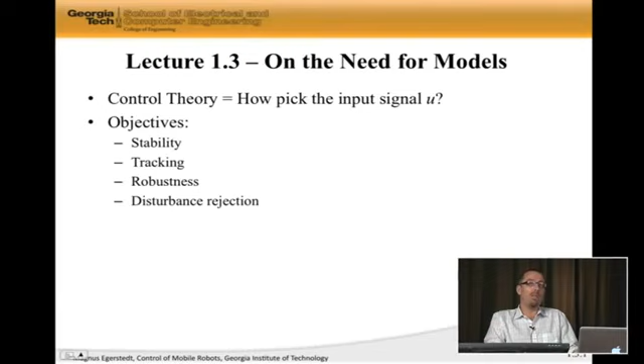A companion to robustness, in fact, one can argue that it's an aspect of robustness, is disturbance rejection, because at the end of the day, we are going to be acting on measurements, and sensors have measurement noise. Things always happen. If you're flying a quadrotor in the air, all of a sudden you get a wind gust. Now that's a disturbance. If you're driving a robot, all of a sudden you're going from linoleum floor to carpet, now the friction changed. So all of a sudden you have these disturbances that enter into the system, and your controllers have to be able to overcome them, at least reasonable disturbances, for the controllers to be effective.

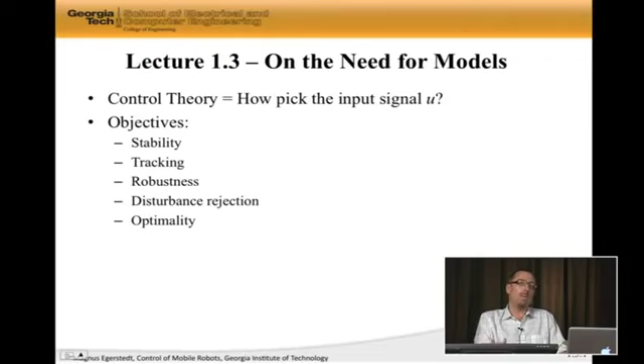Now once you have that, we can wrap other questions around it, like optimality, which is not only how do we do something, but how do we do it in the best possible way. And best can mean many different things. It could mean, how do I drive from point A to point B as quickly as possible, or using as little fuel as possible, or while staying as centered in the middle of the road as possible. So optimality can mean different things, and this is typically something we can do on top of all these other things. And in order to do any of this, we really need a model to be effective.

So effective control strategies rely on predictive models, because without them, we have no way of knowing what our control actions are actually going to do. So what do these models look like? Let's start in discrete time. This means that at distinct time instances, things happen.

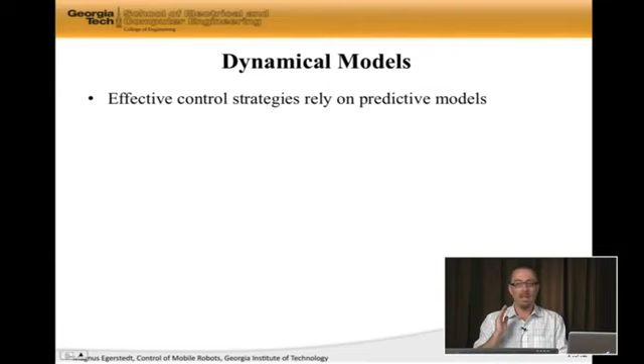In discrete time, what we have typically is that the state of the system, remember that X is the state, at time instance k plus 1 is some function of what the state was like yesterday at time k, and what I did yesterday. So the position of the robot tomorrow is a function of where the robot is today and what I did today. And F somehow tells me how to go from today's state and control input to tomorrow's state. This is known as a difference equation because it tells you the difference between values across different time instances. So that's in discrete time.

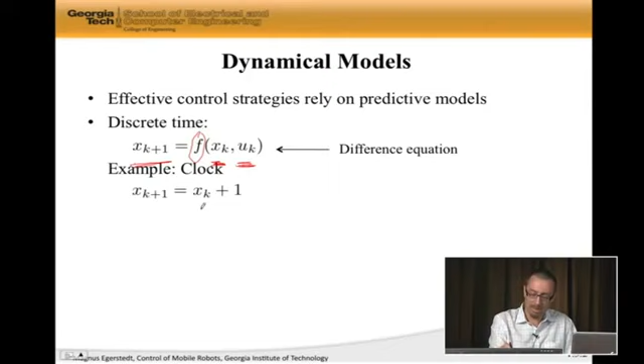And here's an example of this. This is the world's simplest discrete time system. It's a clock or a calendar. This is the time today. Now I'm adding 1 second, and this is the time 1 second later.

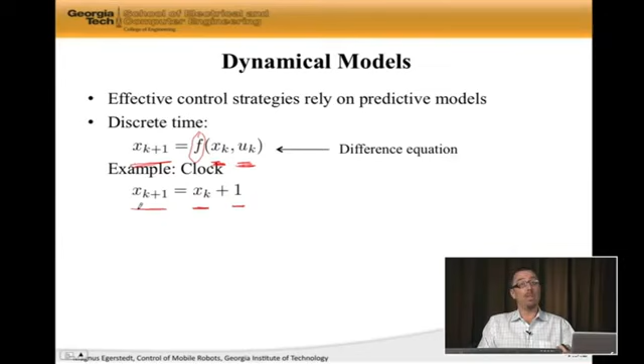So the time right now plus 1 second is the time 1 second later. This is clearly a completely trivial discrete time system, but it is a difference equation. It's a clock. So if we plot this, we see that here is the state, which is what time it is, as a function of time. So it's silly, but at 1 o'clock, the state is 1. At 2 o'clock, the state is 2, and so forth.

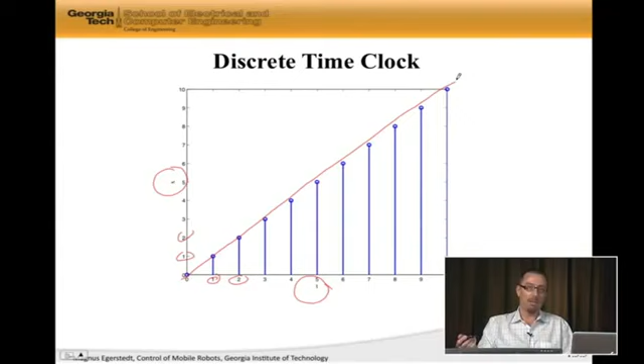And you get this thing with slope 1. So this would be the world's simplest model. There are no control signals or anything in there, but at least it is a dynamic, discrete time model that describes how a clock would work. Now, the problem we have with this, though, is that the laws of physics are all in continuous time. And when we're controlling robots, we are going to have to deal with the laws of physics.

Newton is going to tell us that the force is equal to the mass times the acceleration. Or if we're doing circuits, Kirchhoff's laws are going to relate various properties to capacitances and resistances in the circuit. So we're going to have to deal with things in continuous time. And in continuous time, there is no notion of next. But we have something almost better, and that's the notion of a derivative, which is not next, but it tells us the change with respect to time.

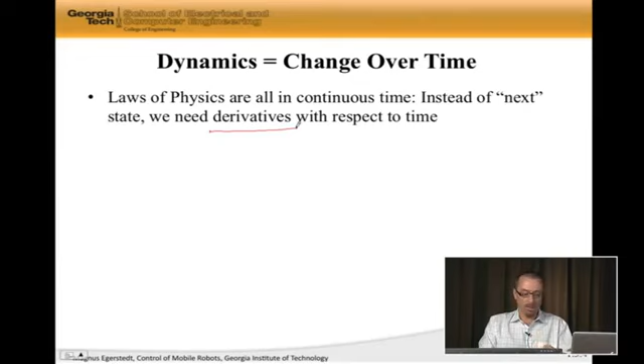The point is that these are both the same equations, and they are differential equations because they are relating changes to the values of the states. So if we go back to our clock, what would the differential equation of a clock look like? Well, it would be very, very simple. It would say that the rate of change of the time is 1, which basically means that the clock changes a second every second.

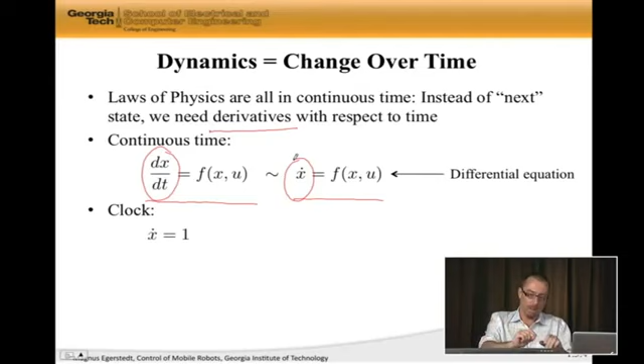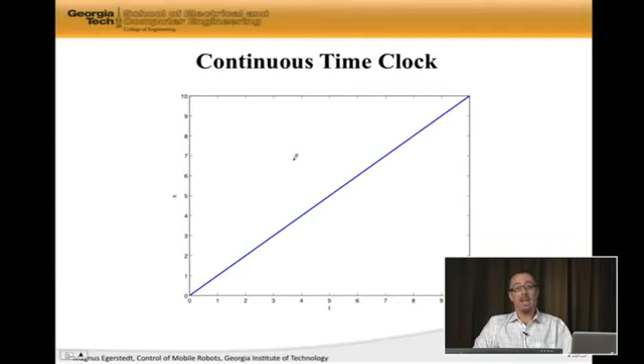That's what it means. So when I drew this picture of the discrete time clock, or I drew this line diagonally across it, what I was really doing was describing this. So this is the continuous time clock. X dot is equal to 1. And we are going to need, almost always, continuous time models for our systems. And in the next couple of lectures, we're going to start developing models of particular systems.

But before we do this, I want to say a few words about how to go from continuous time to discrete time. Because our models are going to be continuous time differential equations. But then when we're putting this on a robot, we're going to put it on a computer. The computer runs in discrete time. So somehow we need to map continuous time models onto discrete time models.